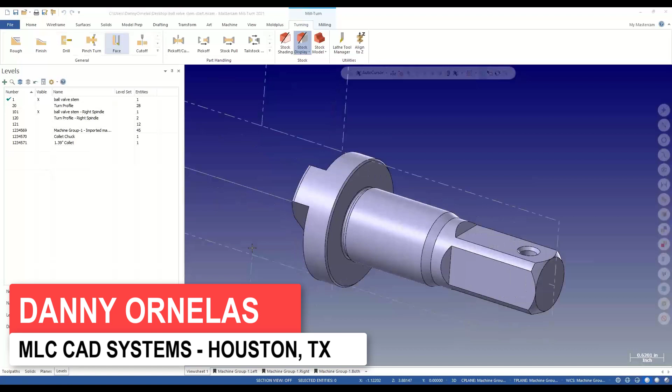What I'm going to be presenting today is going over some things. If you're a Mastercam user, a lot of the things you're going to be seeing today are going to be very familiar. The way we do toolpaths in the mill turn environment is really no different than the way you do milling and turning in standard Mastercam.

Got the standard interface. I have a part here, just back from my old oil field days. Got a ball valve stem here, and typically in the past, back when I was still a machinist, back in the last century, this would be done in possibly 3, 4, maybe 5 ops. Take some to the saw, cut them off to size. Do a lathe operation on one side, lathe operation on the other. Maybe 1 mill op this way, another mill op on the 4-axis, stuff like that.

So now we have these more advanced machines, and let's see if we can get this done all in one operation here. Get a part off here. So I have the parts already set up. I'm not going to go too much into the setup of the jaws and everything today. Just going to focus on putting some toolpaths here and show you how Mastercam works. And the purpose of our demonstration today is to show the advantages.

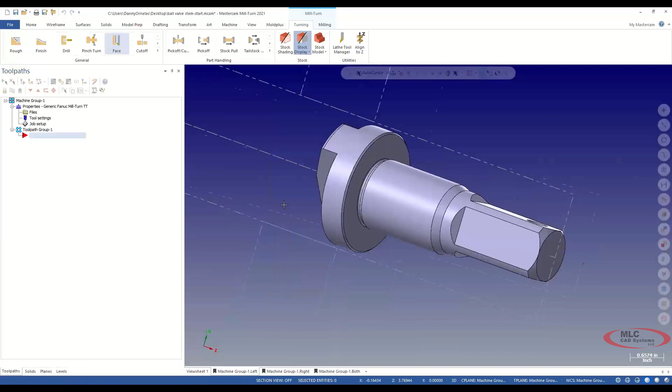I'm gonna go ahead and turn off my turn profile here. I'm gonna start off by concentrating on the turning toolpaths for the left upper spindle. So this machine that I have called up has upper turret, lower turret. We can machine on the left spindle, machine on the right spindle. So we're gonna turn all this part, turn the stuff on the right spindle, and then concentrate on the milling.

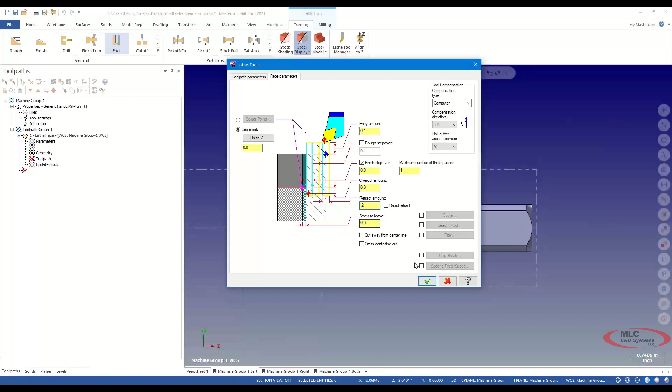So I'm gonna start off with the facing operation. And I already have some 3D tools called up here. So I'm gonna start off with my axis combination here, upper left. I'm gonna pick this tool and just do a facing operation. I'm gonna make sure that I retract enough here. And I'll select OK to that.

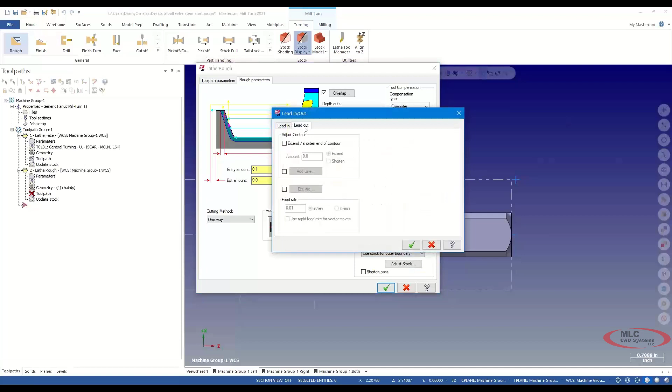Then I'm gonna do a roughing operation. I'm gonna start off from that chamfer back to this chamfer right here, making sure I don't hit my jaws. I'm gonna pick the same tool and make some settings here. I'm gonna go ahead and lead out. I'm gonna extend the end of my cut 100 thousandths. I want to prep this chamfer, so when I do the second op, it cleans this up pretty clean. So select OK to that, and then OK to the whole thing. And then I have that turn toolpath.

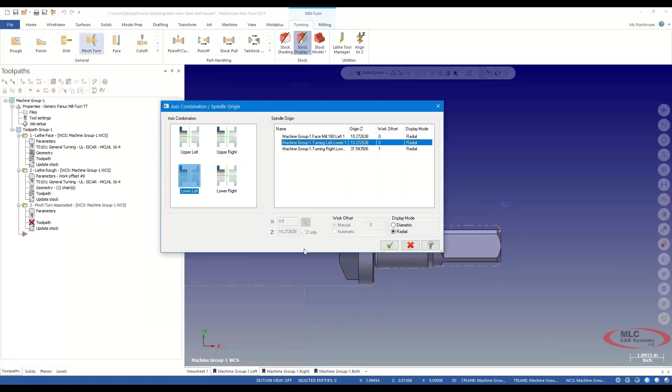Now, because I have an upper and lower turret, I can do a pinch turn. So with pinch turn here, I'm going to switch over to my lower left. My tool's going to update. I've got this one already set up. For my presentation, and this is what I recommend when we're setting up libraries for customers, LL lower left, LR lower right. All these tools have prefixes on them.

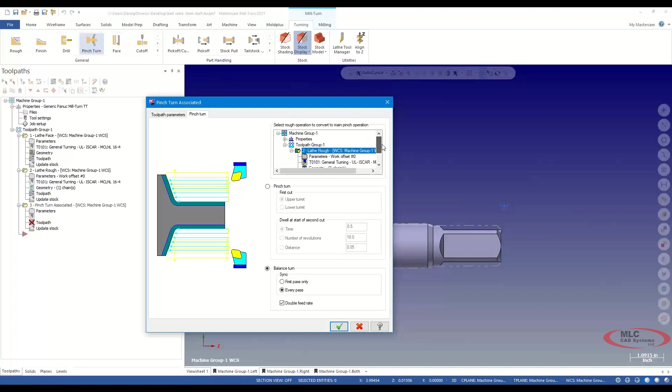I'm going to do a balanced turn for every pass for the only roughing operation I have. But if there were multiple operations, you could pick which one you wanted to sync up with. We'll select OK to that. And now we have a pinch turn here. So just like that with 3 operations, actually, you know what? I need to finish this. So I'm gonna go ahead and do a finish pass.

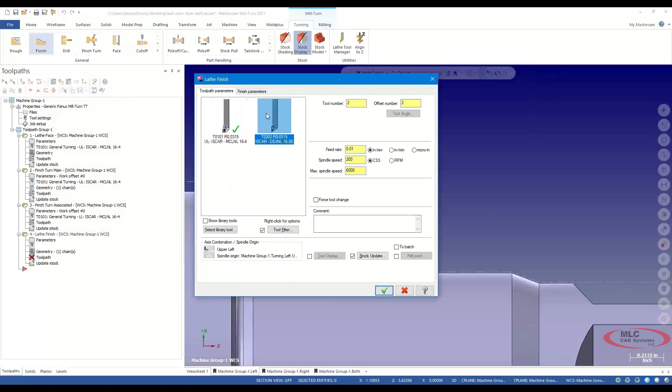Select that chamfer to that chamfer right there. I'm gonna pick this tool right here. And this time I'm gonna allow it to do a plunge cut so I can handle that little undercut right there. And again, with my lead in, lead out, I'm gonna extend the back side of the contour 100 thousandths. And I'll select OK to that.

All right. So just like that, in 4 little simple operations, I've finished all the turning for the left spindle. Now let's concentrate on this side over here. I'm going to go ahead and do a facing operation.

I'm going to pick my lower right. And I have a lower right tool right here. See, lower right. And it recognizes and it knows where the stock is at. Select OK to that. And it faces off that operation.

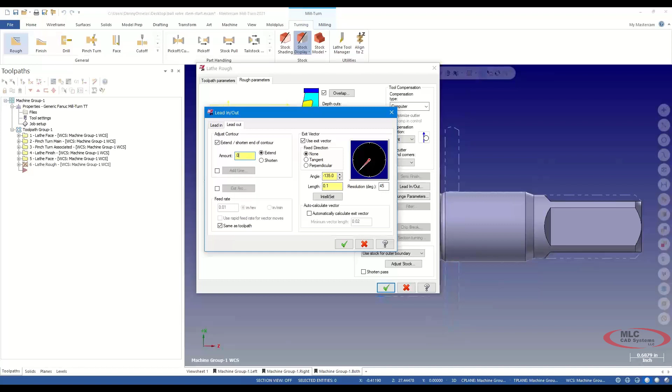Go ahead and do a roughing operation from this angle to the OD of the part. And the same thing, I'm going to go ahead and use stock recognition. And I'm going to lead out the backside. Now I have to be careful not to go too far because I've got my collet right there. But I do want to extend it out a little bit. Just say 50 thousandths. And I'll say okay to that.

I'm going to go ahead and use this tool to finish off as well. Might as well do a finish toolpath with that. I'll update that. So just like that, I have all my turning done. I have 6 simple operations. Now, let's show you some additional benefits for mill turn. This is obviously just what you're familiar with in Mastercam.

I'm going to hit the G1 button here. Now, in a standard mill or lathe, they'll take you directly to the post processor. With the mill turn, it'll take you to the IOF. It's our intermediate output format. I call it the intermediate output file. And this is where you can do all your syncing and any additional settings you may want for your G code.

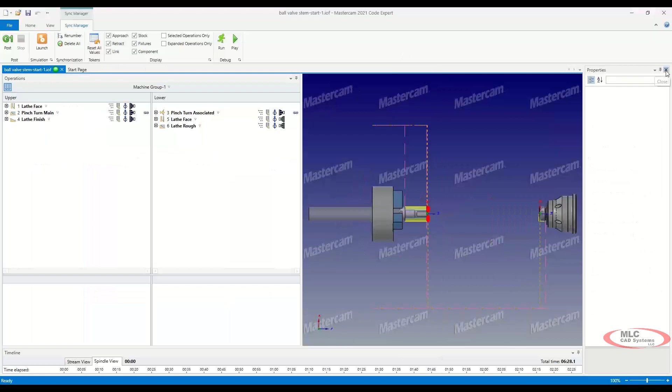Let me drag this over here. It popped over here on this screen. I'm going to close some of these windows out. So here it shows you a quick preview. I've got a collet chuck on one side. Shows you the part. Shows you all the tool paths. All these little points are the sync points here. You notice as I pick on them, the other one matches up along with it. Here's all our operations here.

Now I can expand these, and even in the pinch turn, if I click on motion, this one here, it starts showing you all the sync codes that are ready for the pinch turn. You notice as I highlight on these over here on the graphical side of the window, it shows where those points are at. But I want to add some more syncs.

I want to make sure that no matter what, these tools start at the same time and they finish at the same time. I can just click and drag and I can add additional syncs. All right. I want to go ahead and say I want these two to start and finish at the same time, or at least start at the same time. I'm going to go ahead and save my settings. Go ahead and hit the launch button here.

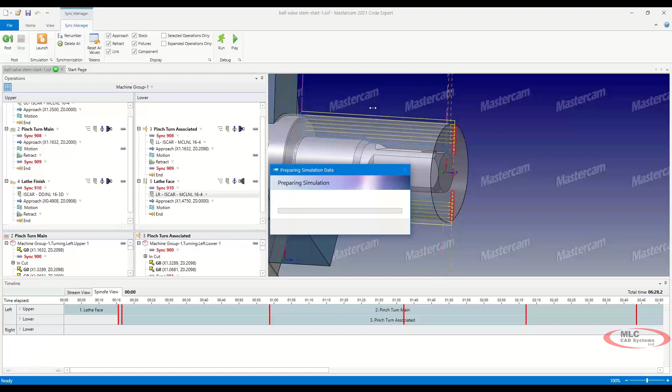Give it a few minutes, and I'm going to launch the machine in my simulation. By the way, down here we have our timeline, and what I'm trying to do as I'm programming, I'm trying to avoid large gaps in my timing here. So if I have a turret sitting around not doing anything while the other one's doing something, then I can look at my toolpath and say, how do I optimize all the motion of my machine to try to get the best toolpath that I can.

I'm going to close everything down. I'm going to leave my collision report open. I think that's pretty vital here. Go ahead and hit run for my simulation. Slow them down just a bit. It's going to go ahead and face it off. Then my lower turret comes over. Then it's going to finish up my turning on this side here.

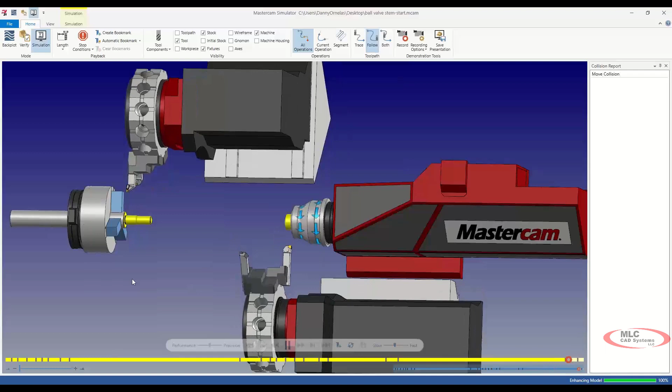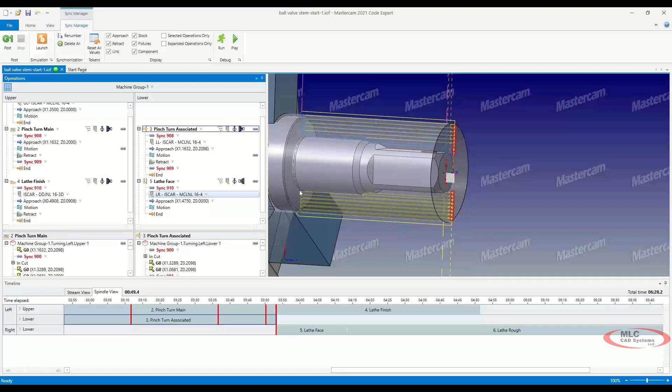So you can see there's the back side of my parts inside the collet chuck. There's my rough stock, and that's what I have so far on this side. All right, that didn't take too long. Okay, we're just barely about 10 minutes into a presentation, and we've already finished all of our turning ops. So let's focus on milling ops.

Again, I'm going to zoom in on this part right here, and let's focus on milling these flats. I'm going to go to my milling operations, and I'm going to use just a simple contour today. All right, I'm going to go ahead and go to solids, turn off face, and I'm going to go to just edges only, and I'm going to pick that edge right there. Select OK to that. Go to my tools.

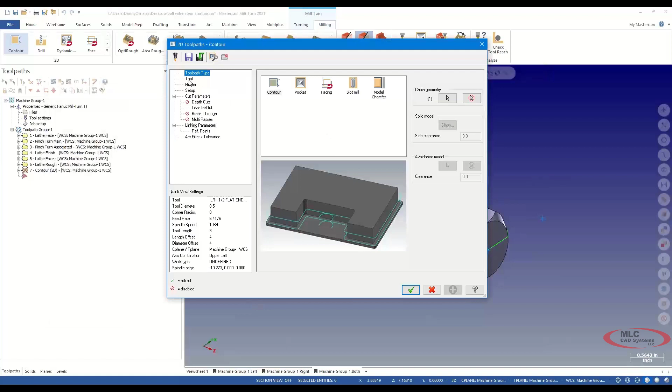I have some tools already preloaded, again with prefixes, upper left, lower right, upper left, lower left. So I'm going to go ahead and pick my 2.5-inch face mill here. My setup is upper left, and I'm going to do Y-axis cross. For my lead in and lead out, it's going to enter in, come straight into the cut. And then for my parameters, I'm just going to use incremental values here.

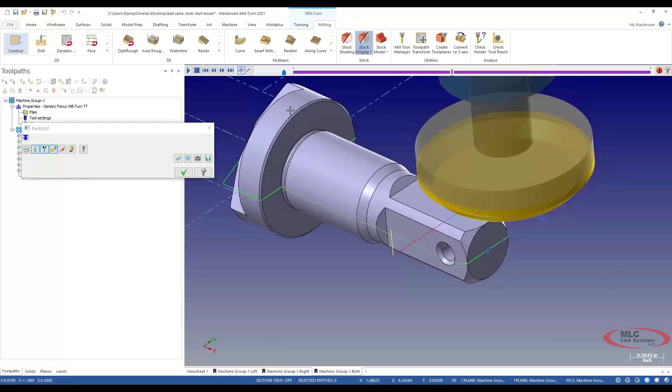And I'll select OK to this. I'll backplot that. So backplot is still the same functions you get in Mastercam. I'm going to take advantage of that 45 degree on that face mill. Take all that in one pass for the presentation.

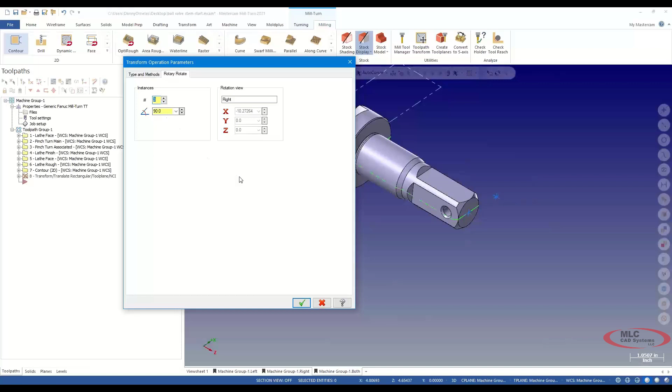All right. Now I'm going to go ahead and do all the other three sides. I'm going to do a toolpath transform. I'm going to do a y-axis cross, upper left, on this operation, and I'm going to rotate it. I'm going to rotate it 3 additional times, 90 degrees. I'll select OK to this. Backplot. There's my additional passes right there.

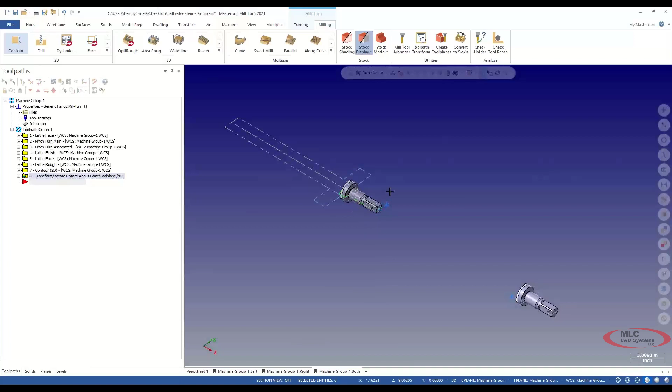So the way I program mill turn, and this is just, you know, now I'm kind of expressing an opinion of how I do things. I kind of look at this and I say, how do I want to see it on the machine? So while this tool is milling these flats, I've got a spindle over here that's not doing anything. It's just finished turning. So I'm going to go ahead and set up a tool to mill this side as well.

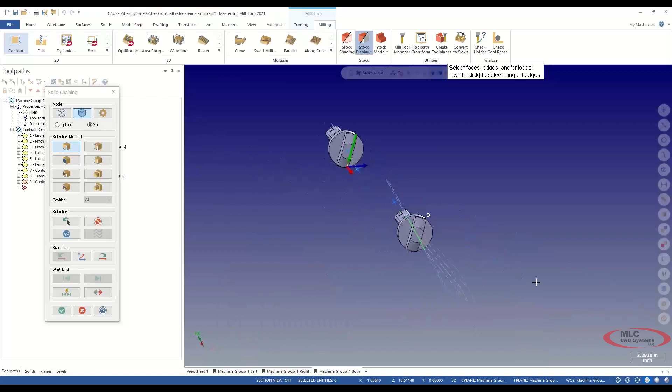So I'm going to go ahead and do a contour. Same thing. I want to pick that edge, spin this guy around like this. Zoom in here. And I'm going to pick that edge right there like that. Select OK. Select my next tool. So my lower right, my 1/2" end mill. On my setup, I'm going to go ahead and do a Y face, lower right.

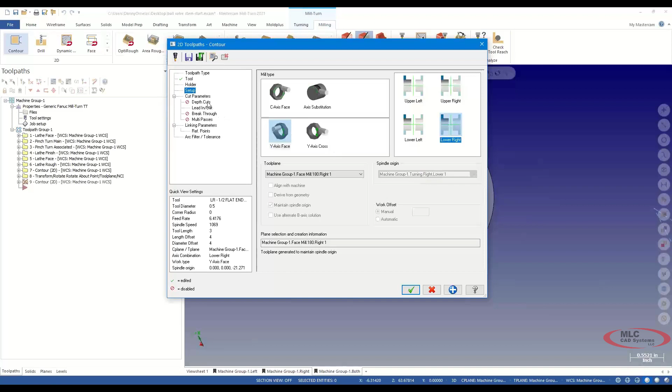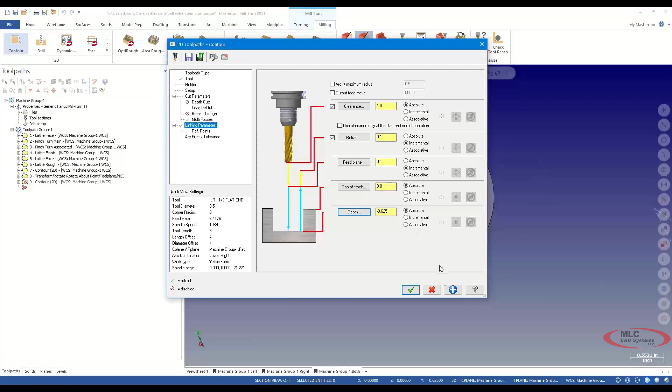I'm going to do multi-passes. I'm going to do 2 multi-passes at about 3/8 of an inch. In an absolute mode, my depth is going to be to the bottom. Top of stock will be at 0, and then I'm going to leave everything else the same. Hit OK, and I'm going to go ahead and backplot that. And there is my tool path to mill that. And again, I'm not really messing with depth cuts and so forth.

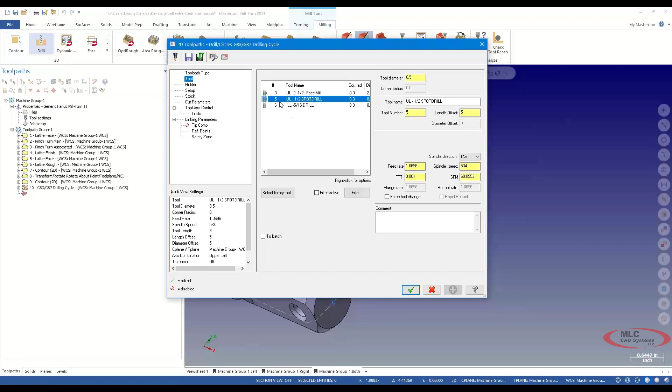So once those 2 mill operations are done, let me focus on drilling these holes. Let me get rid of this. The turn profile keeps coming up. In the milling, we'll go ahead and do a simple drill. I'm going to pick that chamfer and that one there as well. So I got 425. Select OK to that. Again, I'm going to go back to the upper left, use my spot drill, and on my setup, upper left, I'm going to do another Y cross. Actually, you know what? I'm going to do an axis substitution. I want this guy to rotate around.

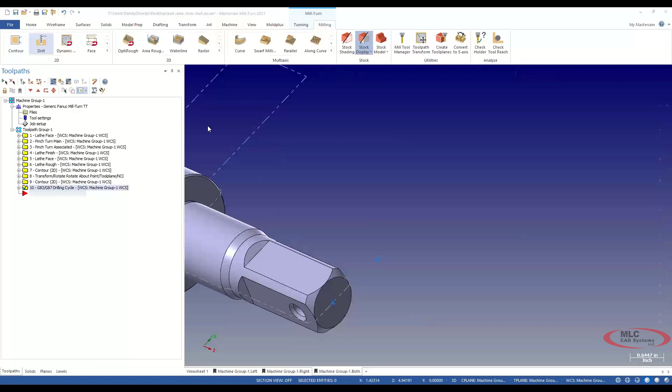So for my linking parameters, everything incrementally here for now. My depth that I want to go to is I want to finish this to a diameter of 0.425, and it calculates my depth for me. So when I backplot that, it shows my spot drill coming around. All right.

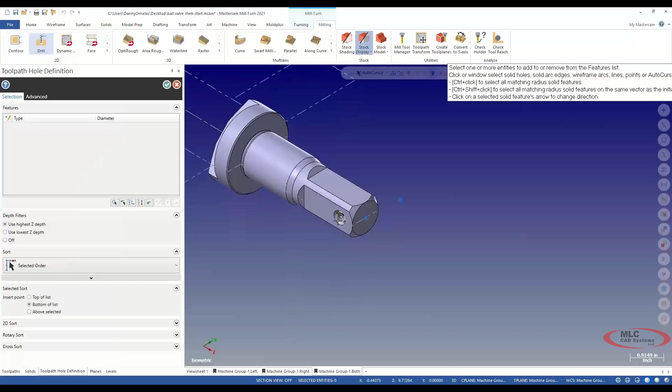Now I'm going to drill the hole. So I'm going to say drill. That's a 5/16. Select OK to that. I'm going to pick the drill. This is on the lower left now. My setup is going to be lower left, a y-axis here. Let's go ahead and do a peck drill.

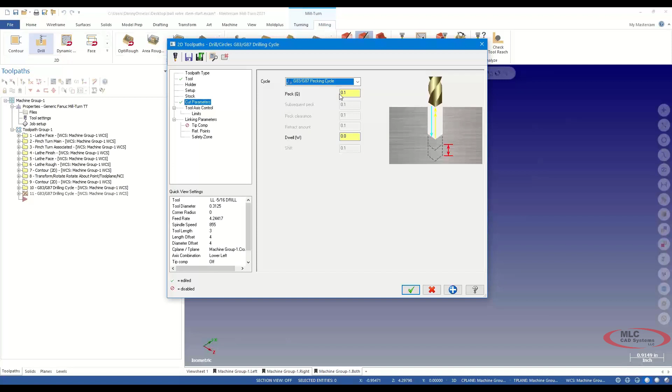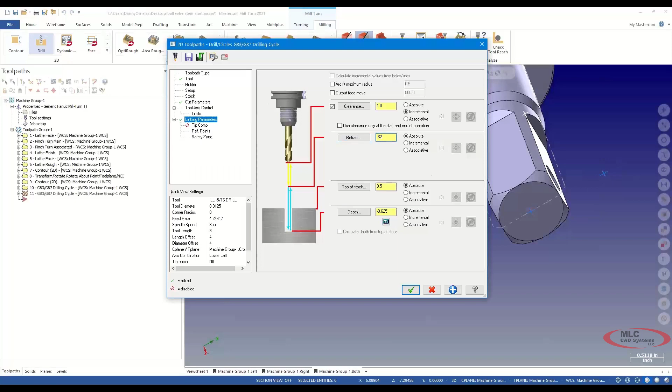And then we're going to go ahead and do our linking parameters. So my depth, I'm going to make sure that it passes all the way through to -0.625. And my top of stock, it's going to start off right at the flats of 0.5. My retract, we'll just make the retract 0.625 as well. And we'll leave it at 1 inch. Select OK to that. And then we'll backplot. And we'll see that it's pecking as well.

You guys do know that in the backplot, you can set it up where it'll show the peck now, correct? That I think was a few releases back. I'm not sure or not. All right, good.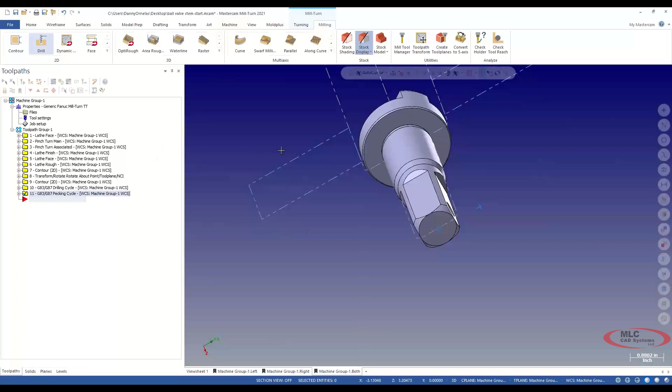So again, here we are, not too far into our presentation. I've got 11 operations. And essentially I have finished programming this part. It's that simple. So again, the way the mill turn environment sets up your tool, your planes, your axis selections and so forth, makes it that much easier just to pick geometry. There's just all kinds of options you can do here. It sets a lot of things up for you, very, very automated.

So now let's go ahead and go back to our IOF. Now it's not going to mess up all the previous syncs we did for the turning. It's just going to, oh, we have an error here. Let's find out what this is. 11 and 9, we have unknown errors. So that's another thing there too. Let's see what's going on here.

These tools are not loaded up. We got two number 4s here. So on my lower turret, I have a conflict, okay? So we cannot have 2 number 4s. One of these needs to be moved to another one. So on the flat end mill, let's just say the drill. I'm going to edit this tool.

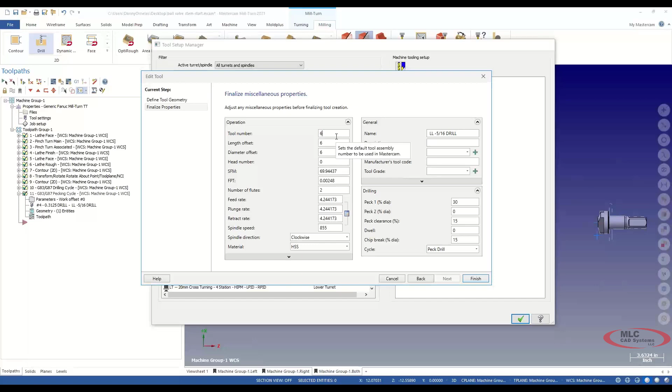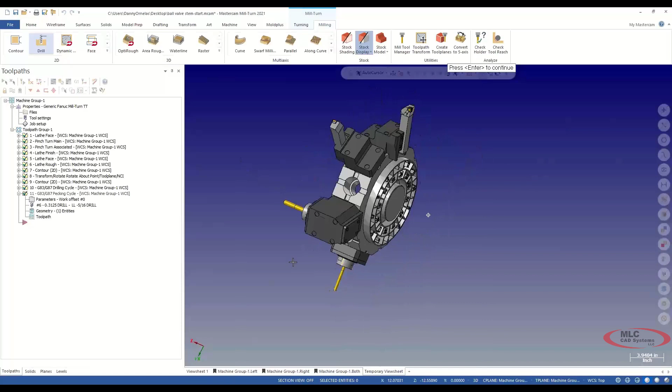We have plenty of stations here. Let's make him tool number 6. I don't know how he became tool number 4. We'll finish this, right? And we should be able to load that and then right click, load that onto the tool as well. While I'm here, you have the ability to view your turrets with all the holders in them. So if you have exact holders from your manufacturer, we can load these tool locators in, all right? That's all part of the mill turn environment.

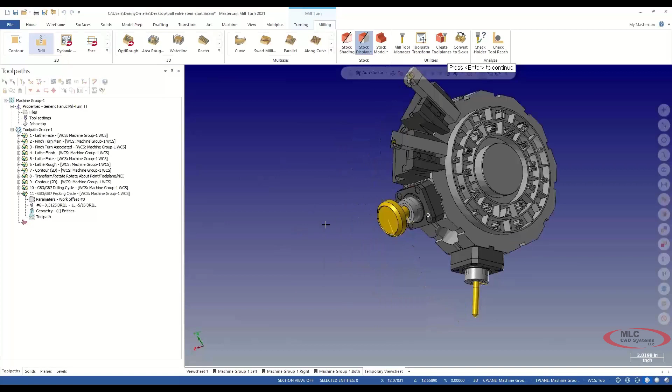Okay, so I have another example that I'll show you here in a little bit. We'll go ahead and view the upper turret. There's my tools for this one right here, like this. All right, select OK to this. Now we can go to our IOF. All right, so for the turning, we already have all our syncs.

So on the contouring, I want the contouring to start at the same time. Again, this is very visual. You just need to see what's going on. And then at the end of the milling, let's go back to this last contour here. I want these to kind of be synced up as well.

And then for the drilling, I can get this opened up here. Since this is going to be spot drilling, this will be drilling the hole. We don't want this tool to start until the end of the spot drilling, like so. We'll go ahead and save this, and then let's launch our simulation.

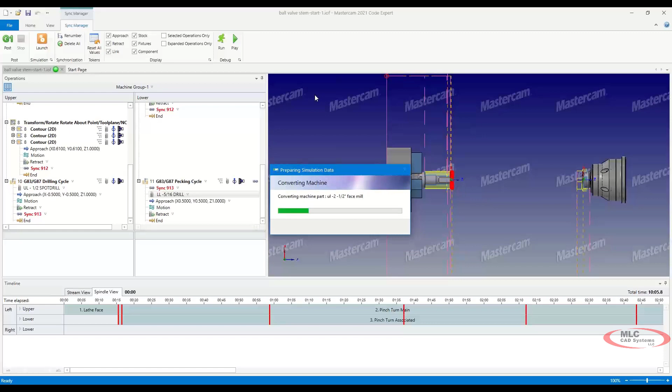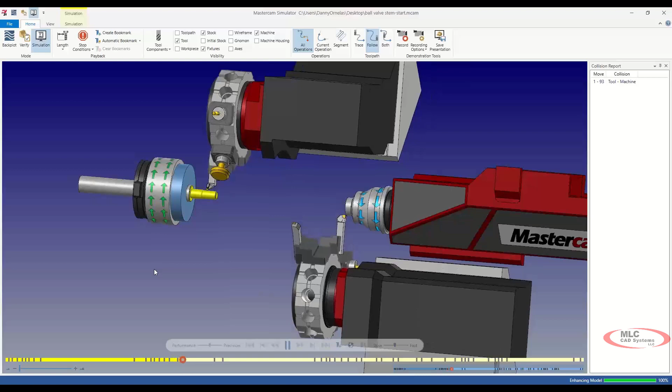So here's the machine. Now we've added the milling tools to it. Let's run it through the simulation. Go ahead and do a facing operation. Bring the lower turret in, do the pinch turn. And then while the left spindle is doing the finish toolpath, we're gonna finish up the turning on the right spindle.

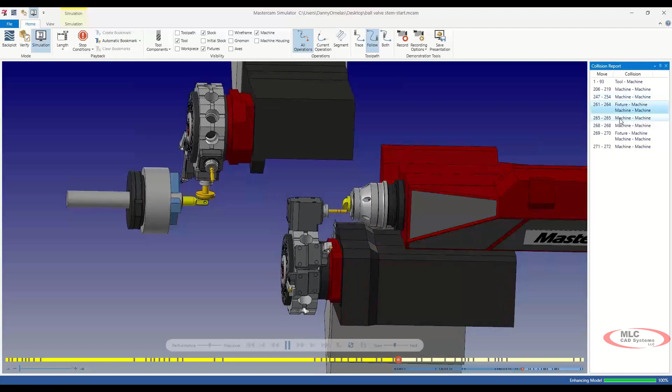My play-by-play here, so at this, oh, we have a crash. We have a crash here. So this is one of the big benefits of using mill turn right here. So all this seems to be good right here. What's going on here? So if I click here, it takes me immediately to where the crash happened. So I have several crashes. So it looks like we don't have reach right here, and our lower stock is hitting the tail stock here.

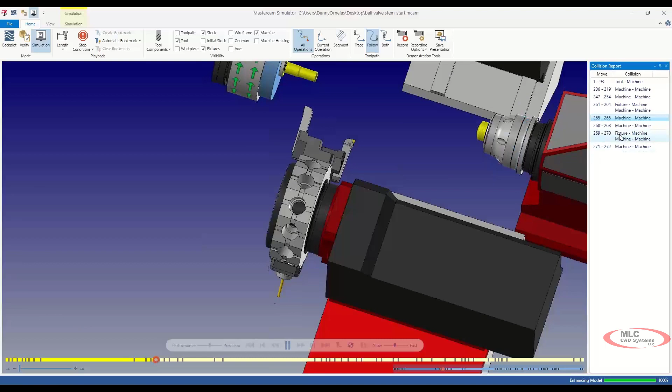So I get these kind of questions a lot, and the first thing would be like, well, maybe we need to look, you know what? I just noticed something here too. This tool is too long. It's hitting the body here. So there's several things we need to do. One, the end mill is sticking out too far. So we need to shorten that. And it's crashing. I can get to it. Oh, it's running the whole simulation again. Sorry about that.

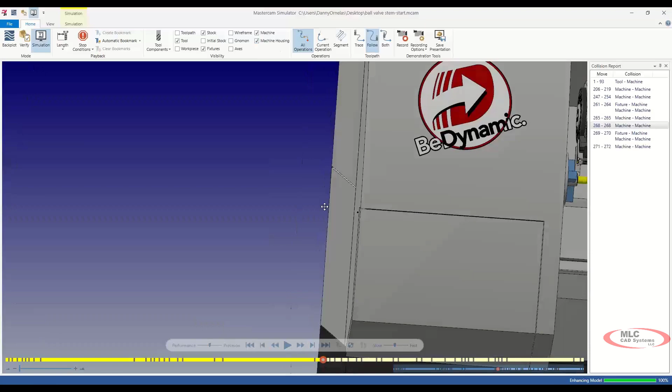We'll pause that. So we're looking at this holder right here. Now we need to get a holder that's extended higher up, and they do make them like that. The problem with that is then you do have to worry about hitting the sheet metal of the machine as well. I've got the machine turned off. So you can't really go too far or you'll be hitting the way down here, right? Looks like there's plenty of room. Now I don't have another holder. So how do we fix this?

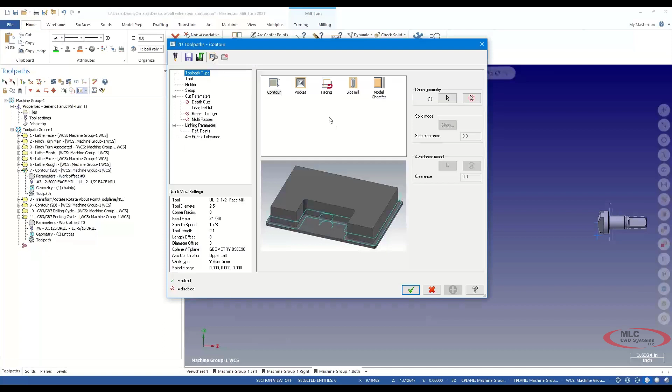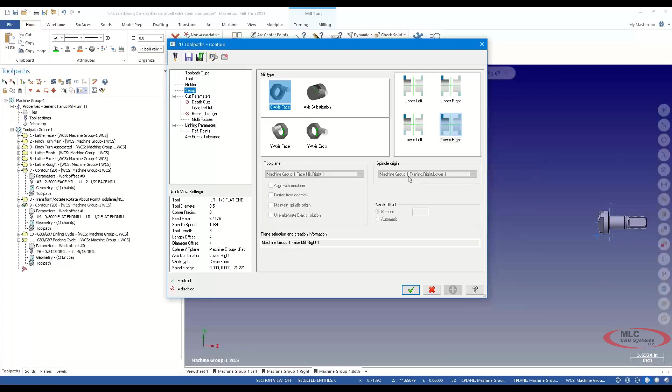All right, let's go ahead and go back to our contour here. This is the face mill. And it has to do with the setup. Right now I'm using Y-axis cross. Nope, that's the wrong one. This guy here. I'm using my lower right, Y-axis face, I'm sorry. What if we change it to C-axis? So versus the tool moving around and the part holding still, we'll bring the part to the tool.

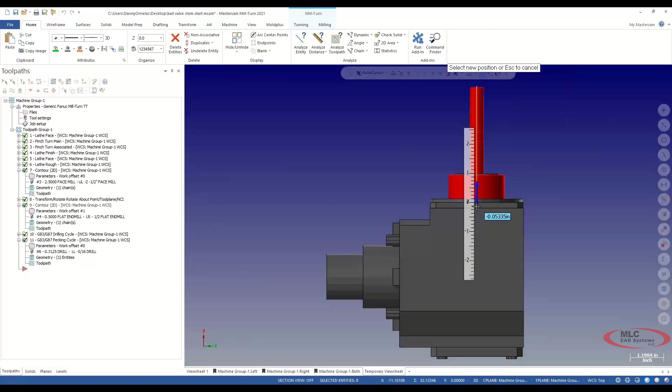What I also want to do is go into my lower turret, my 1/2" end mill here, let's take this guy and I'm going to set projection. He's kind of sticking out too far. I'm just going to drag him down. Let's just say -1 inch for now. We'll leave him like that. Looks like there'd be plenty of room. We'll go ahead and go back into simulation.

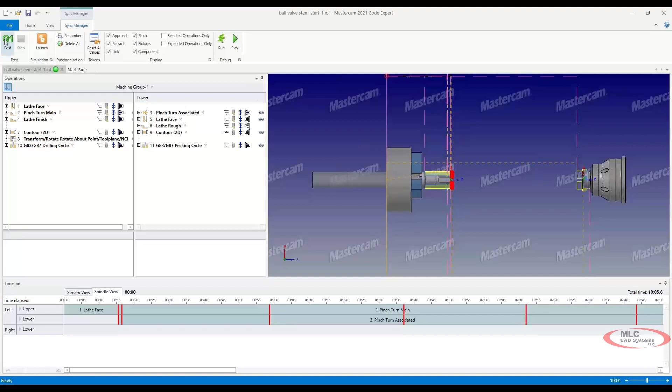And the main thing I want you guys to take away from this presentation is just how easy it is to maneuver through the software, to be able to quickly visualize the results of your selections on your tool paths, how easy it is to get back into the parameter pages, how things are maintained here. So you're getting an absolute verification of what's going to happen at your machine.

Here we go. So we should have one final tool path. Well, not a final tool path here. We're not done just yet. Go ahead and hit the play button here. Just run through the whole thing. So again, I'm going to keep an eye on my collision report over here. So far, so good. No collisions.

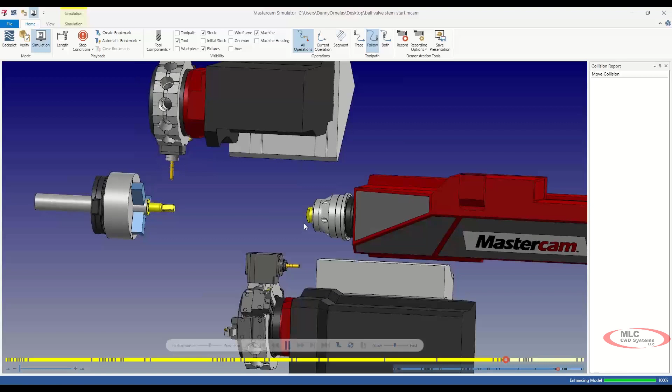Do all the turning. Then we're going to switch over to milling here. So right here's where we had all the crashes. But now we're doing C-axis motion, so the tool stays on the lower part of the spindle and then the part rotates to it. So there were no crashes. And we also shortened up this tool so it's not hitting that lower turret or the lower part of the machine. Okay? So this looks all good.

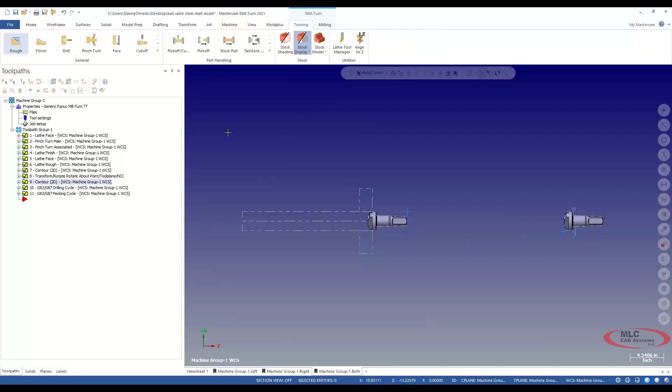Now, one last thing, as I kidded around yesterday in my dry run, my boss says there's just not enough operations here. We only have 11 operations. Well, we still haven't transferred this part over to this spindle. So on the turning, I'm just going to do a pick off cut off right here. And I'm not going to really change anything.

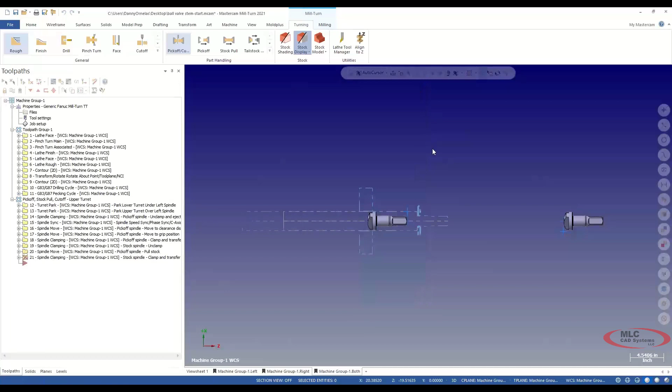Okay, we're going to get all these operations on how to take the part, pull it out, cut it off, park all this, the turrets and everything. Select OK to everything. It's going to come over, grab it, part it off. But now we got 21 operations. I've more than doubled my operations with just one selection here.

For you guys that don't have mill turn, if you're using a standard post processor, this can be time consuming. So don't think that this product is only for machines that have all these multi-turrets and everything. I have another example of a machine with just one spindle, and we do have a lot of customers that have single turrets, dual spindles. That's a very common configuration nowadays. And I'll call up a sample of that one here in a second.

So here's the whole part here. We'll run it through simulation. I think I just have to add one more sync. We're going to go ahead and sync where we park the turrets. So we have this turret parked right here, and we want to go ahead and sync this up right here. So none of this is going to happen until these two get out of the way first. Go ahead and save this, and then launch it.

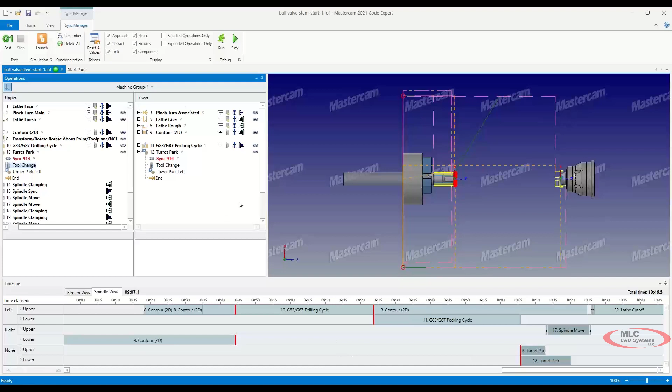And I'm looking at my timeline here. Looks like I've kept this machine pretty busy. All right, here's the simulation. Let's go to this simulation one last time on this part. Again, my focus is on the collision right here. Go ahead and run this.

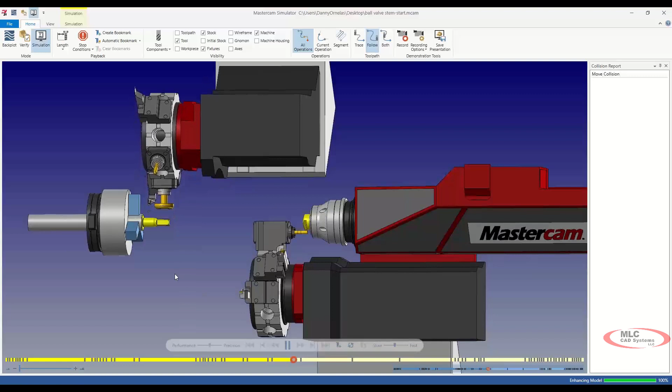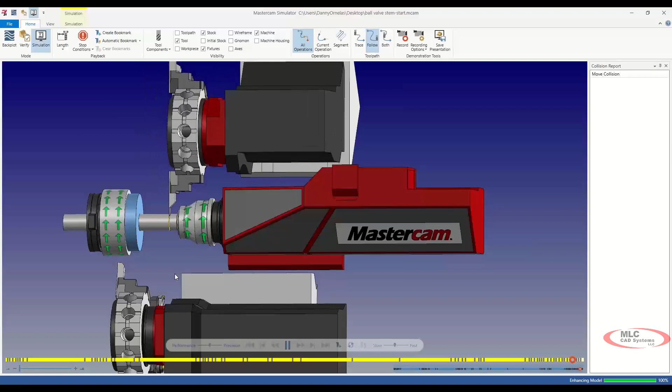All right, so far so good, no crashes. Turrets get out of the way. Pull that stock out, part off blade, and then we're ready to do the next part. Look at that, no crashes. I like it. At this point, let's go ahead and post this out.

This shows up in a dual stream. We can also align the syncs here. So as I scroll this down, it shows each of the operations. There's the pinch turning here, so you can see a lot of syncs going on for each pass. There's our wait code, right? So this does the finish pass. This is the roughing on the right spindle.

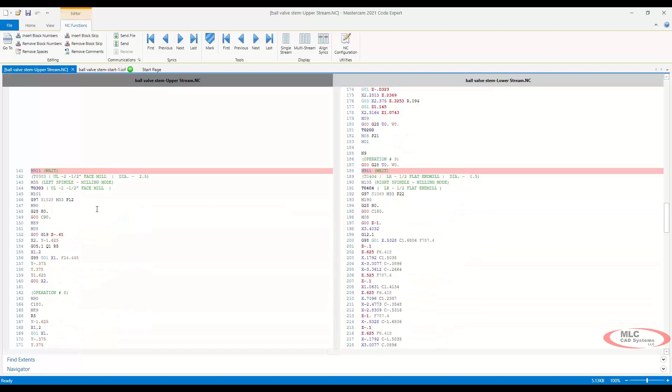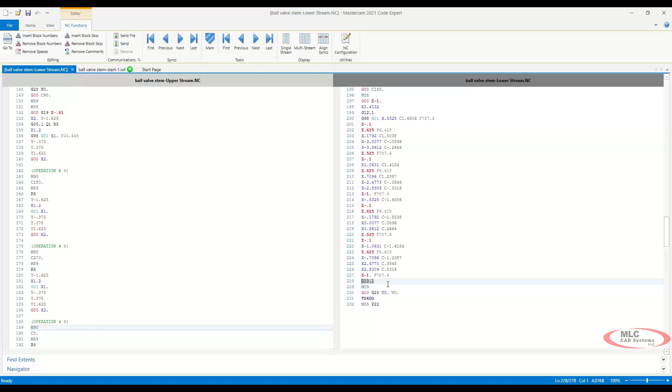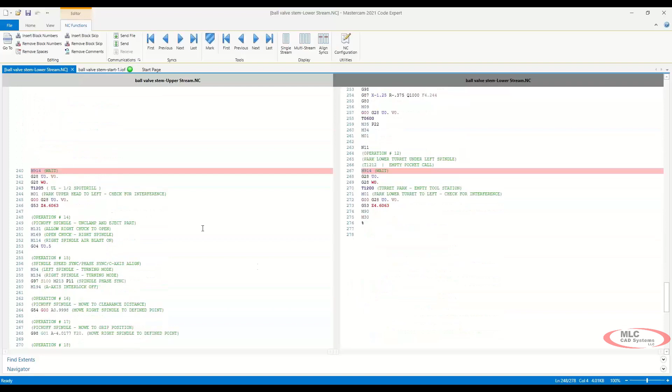We get into the milling, right? There's C90, 180, 270. Should be back to a 0 here. This is milling the flats in the C-axis. We do take advantage of polar coordinate output if your machine has the ability. So G12.1 enables it. G13.1 disables it right here. We're gonna spot drill, and then the drilling here, and then of course there's the part off right here. Go ahead and close this down.

So just like that, in a matter of about 30 minutes, with me doing all this talking, because I can't ever be quiet, I've managed to machine this part. Of course, we didn't go through the steps of loading up the tools and loading up the spindles and so forth. That's another presentation right there.

I just wanted to show you what the flow was like of how you machine a part: take it from one spindle, transfer it over, work on your syncs, verify it with simulation, output the code, verify the code, and then you should be ready to take it to a machine.

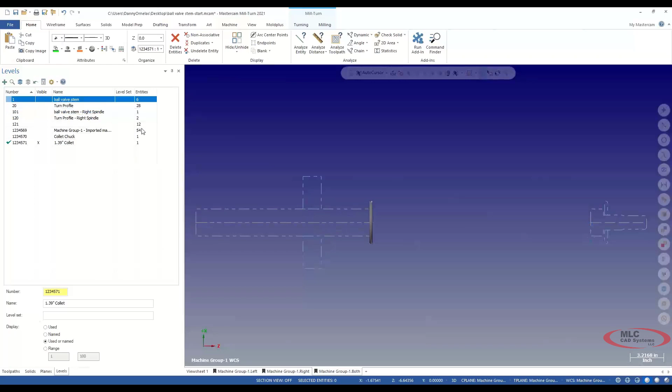So on this machine, I'm going to go to levels. I'm going to turn everything else off. Oops, not that one. This one here. So this machine was just a generic mill turn machine that we use. There's an upper and lower turret, with a sub spindle. All right.

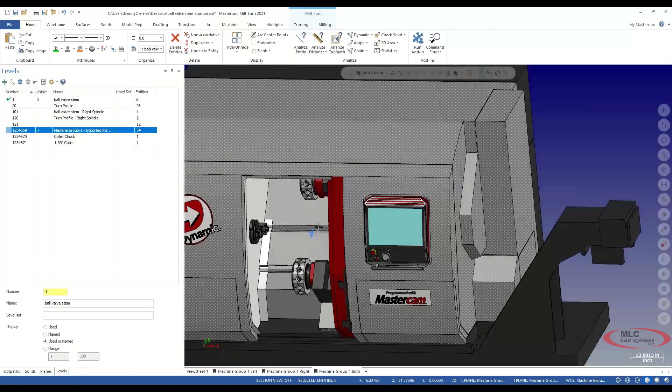Whenever you use mill turn, there's always going to be a layer that has your machine in it. This machine is what we use for the simulation. And I've had guys come in here and run a session, and they delete this level out, and then when they go to simulation, it says it can't run simulation. If you ever get into that instance, just a quick little support: if you go to files and hit reload right here during your session, it will reload that machine back into that level, so that way you can continue on. And I've had a few guys do that.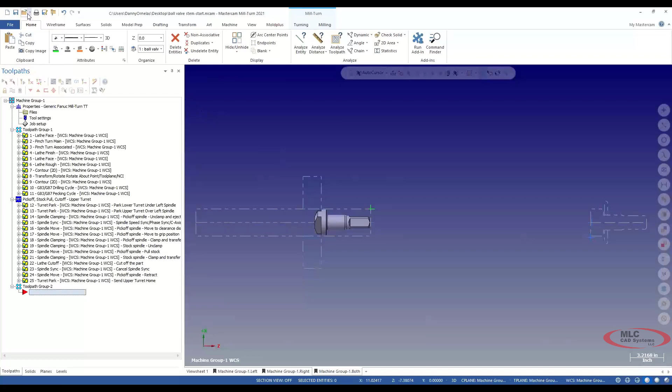Okay, so enough with this part. I'm gonna go ahead and save this. Then let's go ahead. I have another part here. This is from a part we did, I believe it was last year. We did another, oops, hang on a second.

So this one here is for a single turret machine, all right? Same thing. I'm not gonna go through the toolpaths here. We'll go through the IOF. And again, you look at the part, there's really not a lot of syncing going on. For the single stream, that's probably going to be the only difference. There's really no need to do any syncing because you only have just one turret, all right? We go ahead and we launch this.

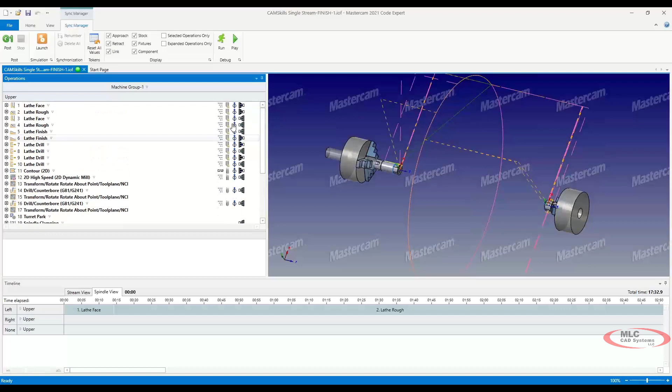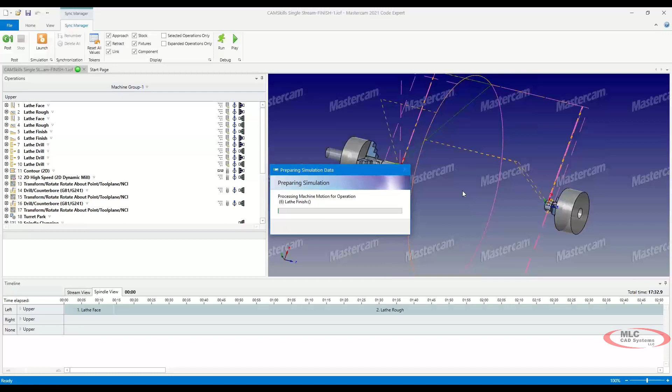And in this example, we have some additional holders. So this is a half index machine. Again, that's another common configuration we see nowadays. Guys are upgrading their simple 2-axis lathes, and they're moving up to live tooling to try to optimize their operations. And also, a lot of machines now have what they call half index.

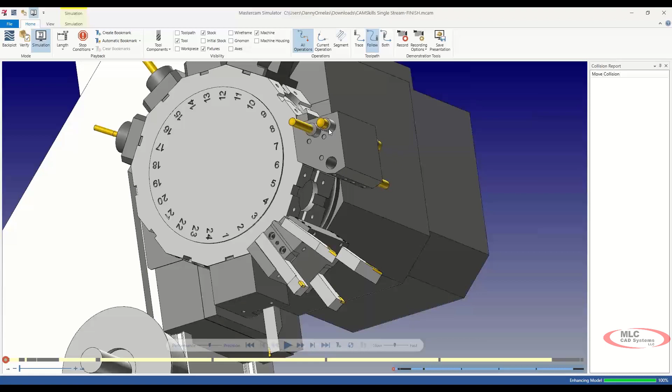Okay, so you've got your flats here. That's 5, but in between you got 4 and 6. And we can also have these multi-station drill type holders. Here's a holder that holds 4 tools right here. So this can be tool number 2, tool number 4, I forget what it is. Let's go ahead and run the simulation on this one. Oops. Go ahead and hit run.

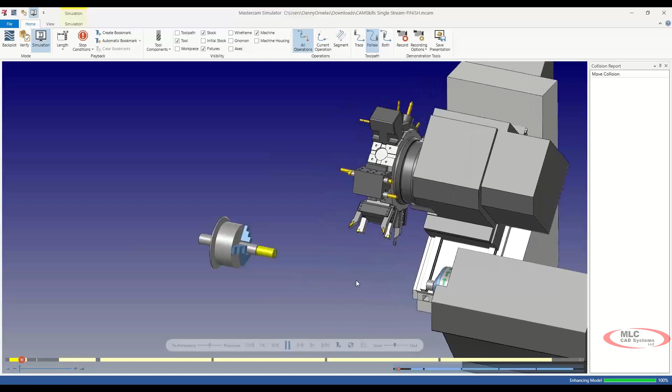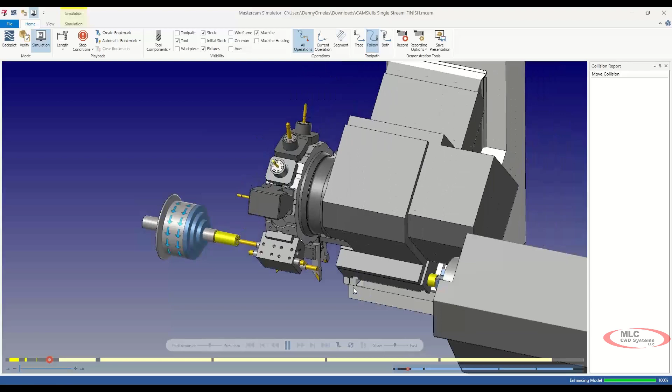So this faces and turns without doing a turret index, so it's going to come over and then work on the left spindle. Then it's going to go ahead, and I've got it going back to a home position here just for the demonstration. You can, in the IOF, designate whether it moves away from the part or stays close in. You can just say none. Excuse me. So here's our spot drills. Again, do a half index. This does some drilling.

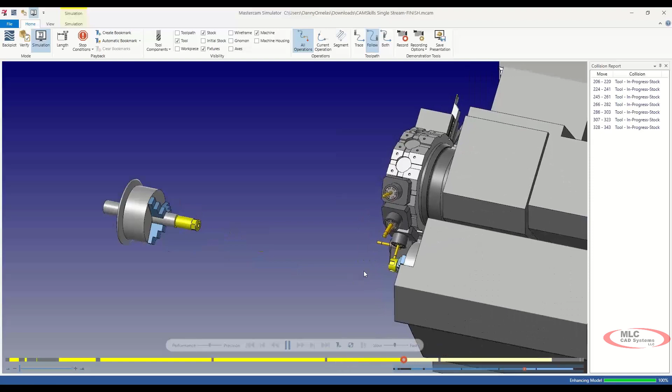And here's some milling. Now, I don't know why that crashed. Oh, I think I know why that crashed. The flute description on that tool, the depth of cut is deeper than the flute right here. So that's what that crash is right there. So we could just go change the definition of that tool. We can even do high-speed machining. That's one thing I did not do in the previous. There's some high-speed machining here, right? We'll do some spot drilling, and then drill some holes.

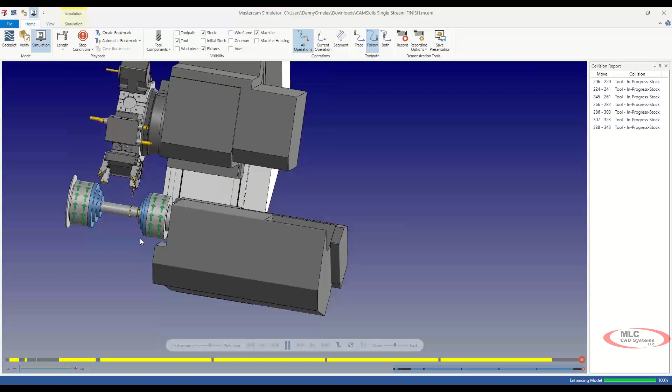And then the turret should go and park away with the transfer. So it ejected the part. Go ahead and grab, pull this out. And then we're going to go ahead and part it off. There you go. So there's 2 quick examples. One was using a full multitasking machine, upper lower turrets, dual spindles. And here's one with a dual spindle and a single turret.

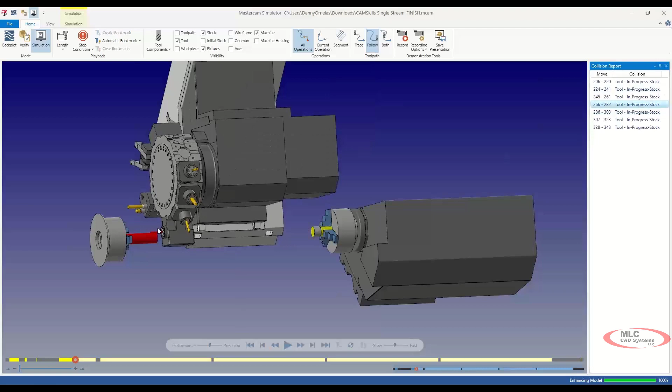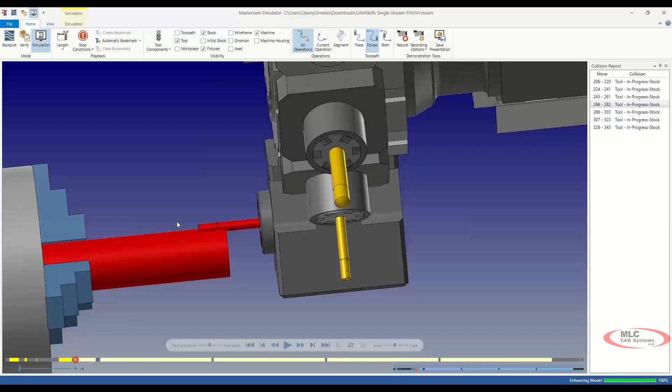Oh, you know what? Let me check this right here. The in-progress stock. I would say that, yes, that is what's going on here. My flute stops right there, so I'm hitting the shank. So we could just go adjust the tool, and then we could get rid of that cut. So it checks everything. I think there was a question about whether it shows collisions with the machine housing. Absolutely. It checks collisions for just about everything. If you define your tool wrong, I've seen this a lot now.

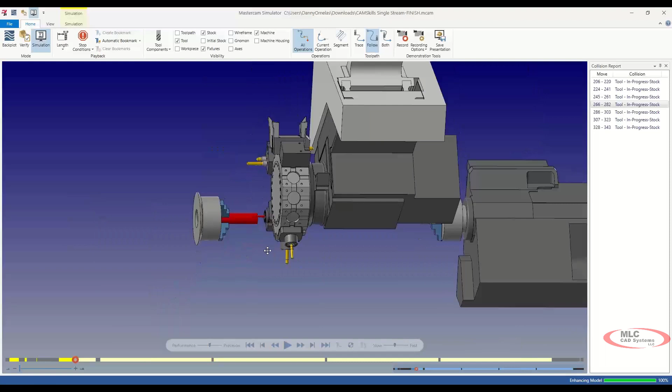Guys are bringing in, now that we can do 3D tools, they'll define the spindle direction in the opposite direction of what the tool looks like in the machine. So you'll have the insert facing up this way, and then the spindle coming around in this direction. So it's not right, and you'll get that error as well. You won't see it in backplot. Backplot will say it looks good. All backplot is looking for is the 2D profile of the part to make sure that the shape of it doesn't interfere. In the simulation, we're looking at way more than that.

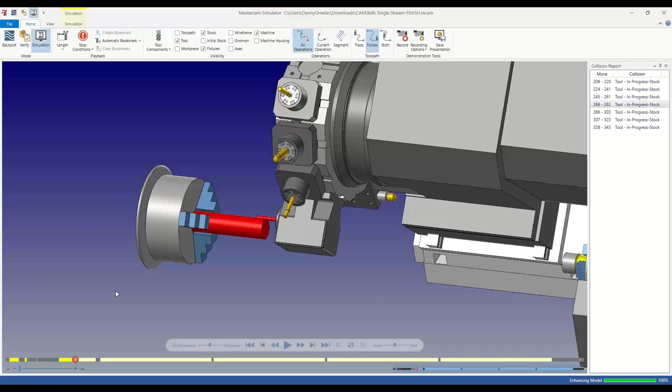If you have a through coolant hole, in the previous presentation, I don't know if you noticed or not, but I had tools in there with little coolant nozzles, and if those would have hit something, then we would have been able to see that collision happen.